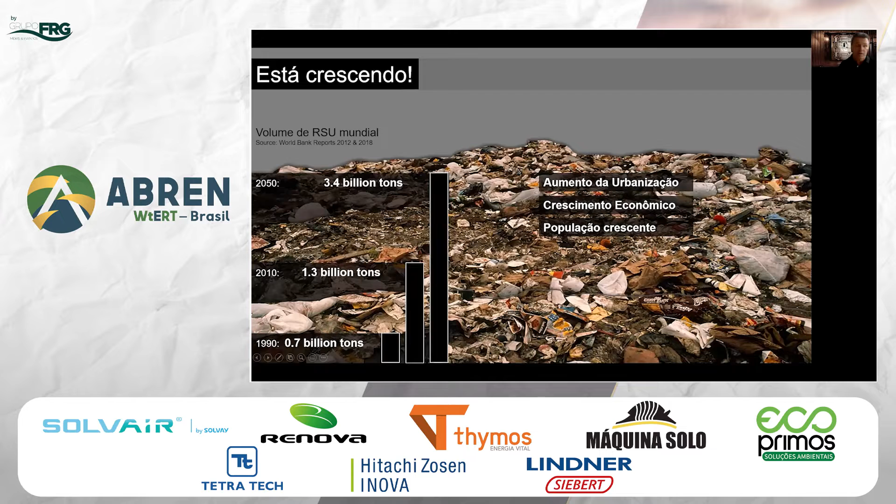So this waste management is a challenge everywhere. And it is polluting. It has a huge effect on our climate, on global warming, because landfills are producing a lot of methane gas emissions, which are 25 times stronger greenhouse gas than CO2. So the contribution on the overall emissions is significant.

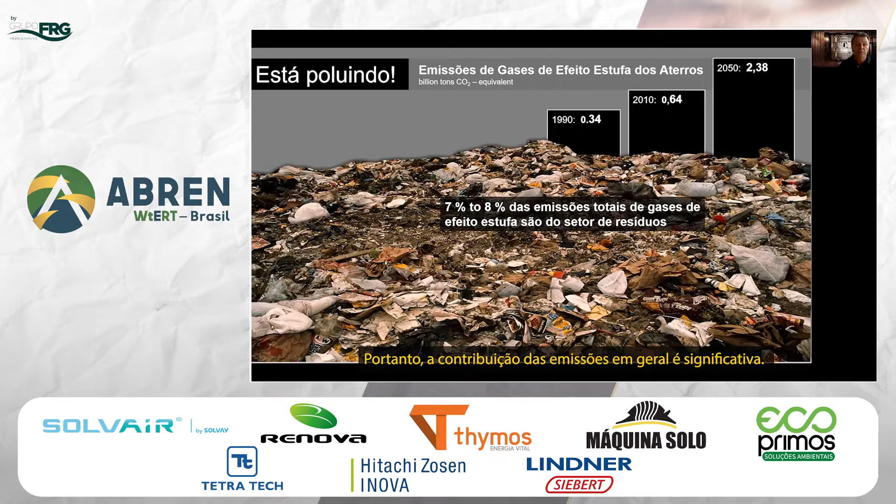Today, landfills are relatively cheap, but the cost will increase because there is almost no space for new landfills. You have a high cost for transportation. You have increasing compliance costs, so you have to follow higher standards, and you have to operate them even when they do not receive waste anymore.

And very important, they are not sustainable. I mean, they occupy territory, human habitat, it's wasted. They pollute groundwater and atmosphere for centuries, and generate also emissions for transport to remote locations. And very important, you cannot benefit from the value that is in the waste. So you cannot recover ecological and economic valuable resources from the waste.

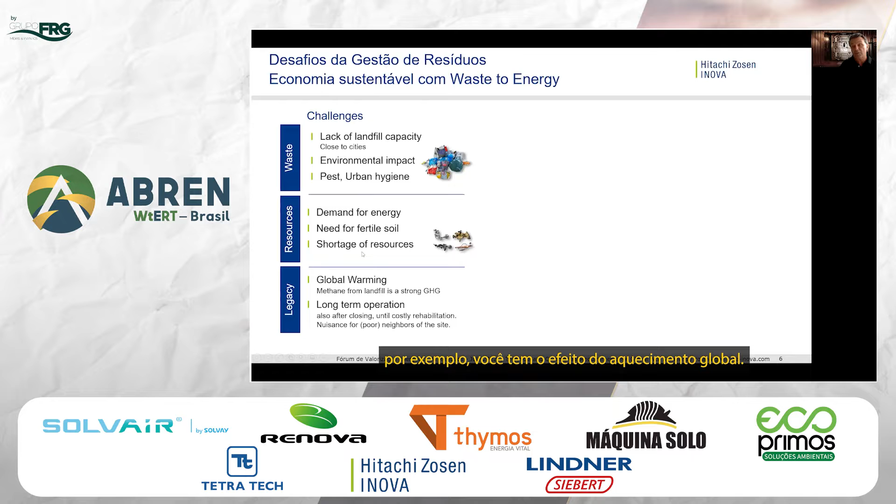So these are the challenges: lack of landfill capacity, the environmental impact. You have the demand for energy, for fertile soil, for resources like metals. For example, you have the global warming effect, and waste to energy has the solutions.

So we can protect the human habitat, protect groundwater, protect people from diseases. We can benefit from the energy content, generate electricity, produce compost from the organic fraction, and recover materials like metals. And we reduce the effect and reduce greenhouse gas emissions.

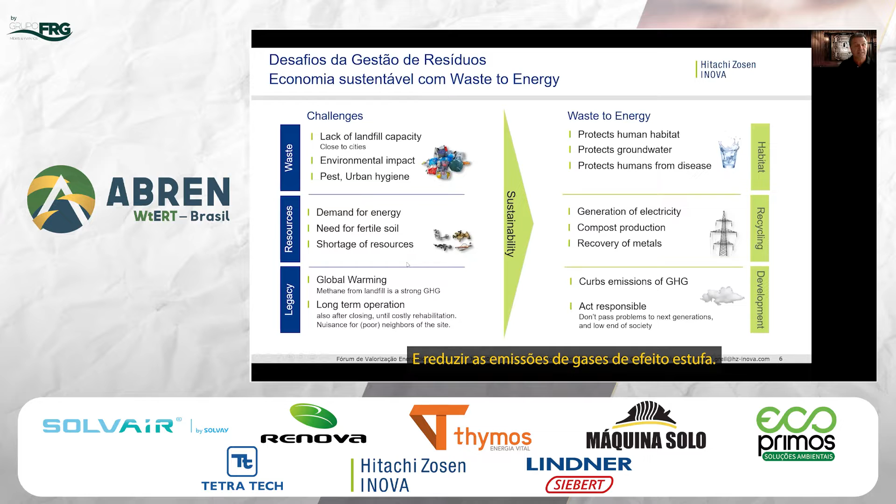So who is Hitachi Zosen Inova? We are the global lead in waste to energy. We are a company based in Zurich, with headquarters in Zurich, having offices in various locations. And we are in this business for more than 85 years. We do build plants, and we also operate and maintain waste-to-energy plants and other solutions that we provide.

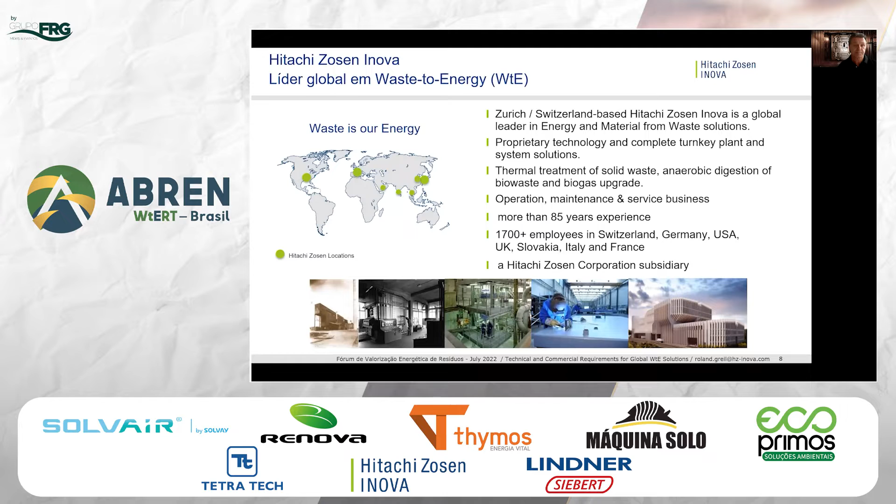We are part of the Hitachi Zosen Corporation group in Japan. Originally they used our technology when we were Von Roll. We started with the first plant in 1937-39 in the Netherlands, basically only a destruction of waste, no benefiting from the resource. Hitachi Zosen Corporation used our technology since the 60s as a licensee. And since 2010, we came together and are now in the same group.

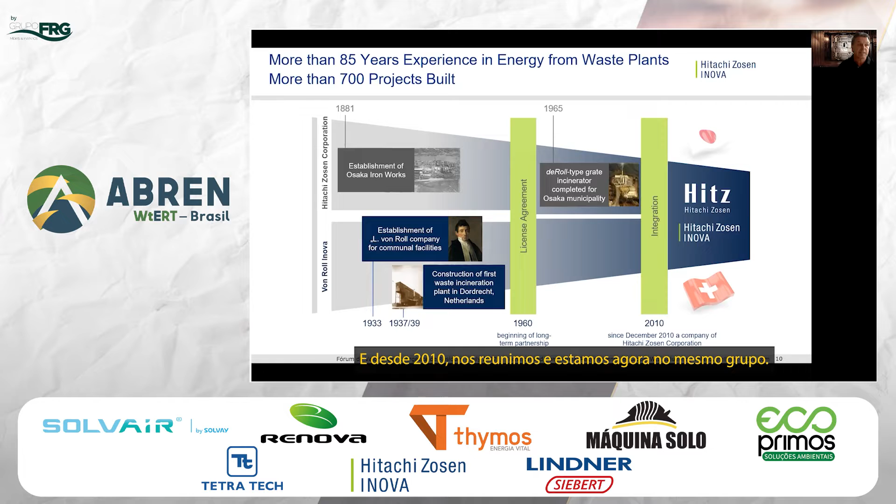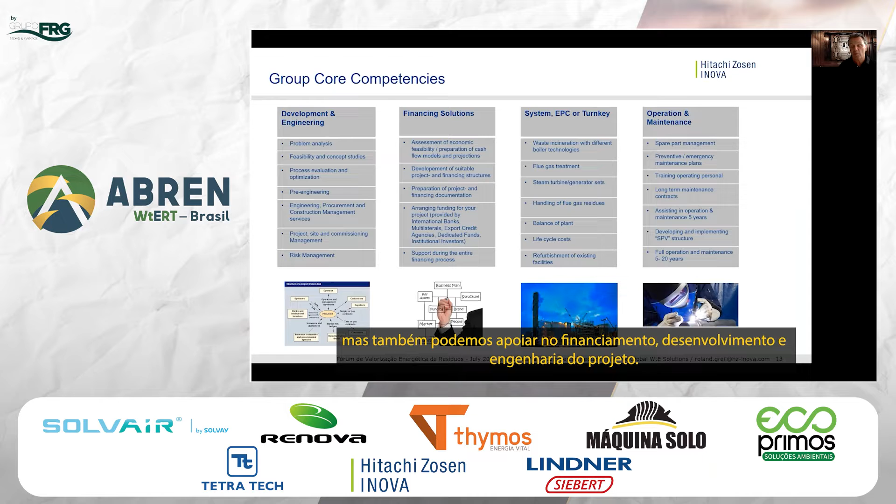We don't only build plants, so we have our own technology. We build the plant as a system solution or EPC turnkey. And as mentioned before, we also operate and maintain plants, but we also can support in the financing, development, and engineering of a project.

Waste to energy is a part of the circular economy. So we are all producing waste, we're consuming, producing more and more waste, which is polluting our environment. So in many countries, it goes still to landfills, where it can pollute the groundwater, and produce methane emissions, which is a very strong greenhouse gas - I mentioned before, 25 times stronger than CO2.

And by this, also polluting our food. I mean, waste plastic goes to the rivers, to lakes, to the sea, and we get it back in our food, in the fish that we eat.

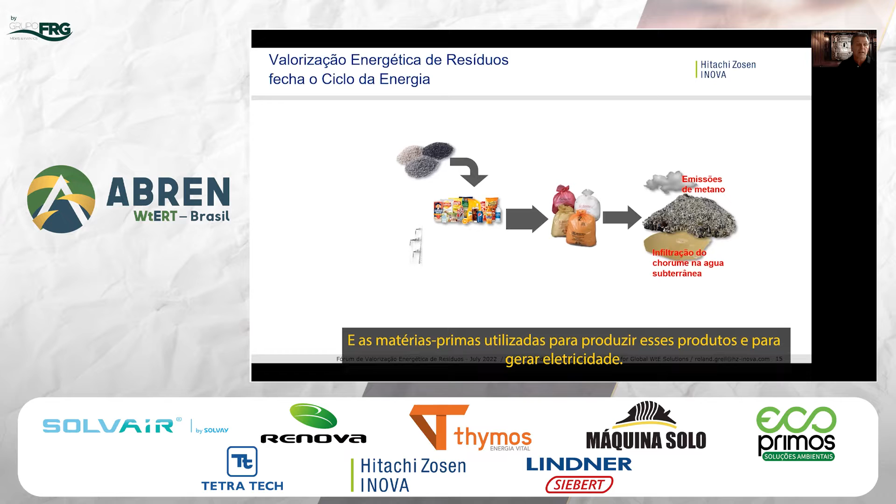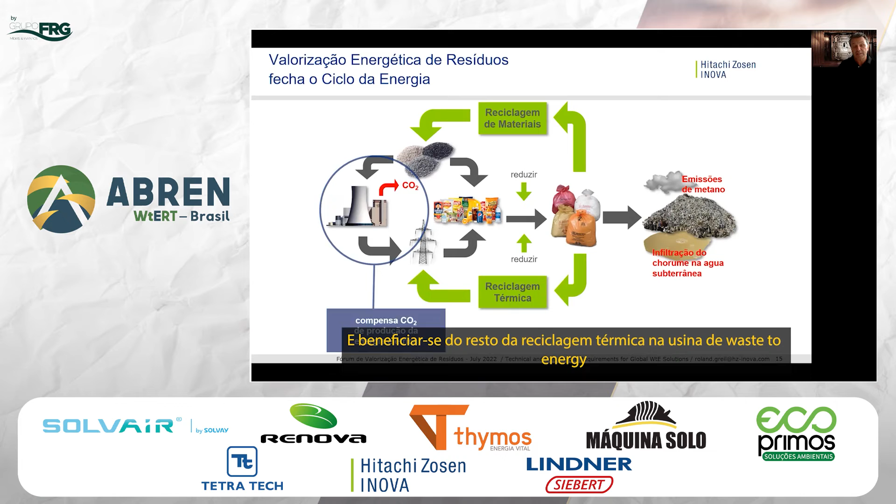Raw material is used to produce those products and to generate electricity. And what we have to do first is to try to reduce, of course, the amount of waste that we are producing. Then, of course, recycle material that has a value and can be recycled, and benefit from the rest in the thermal recycling in a waste-to-energy plant.

So by this, we can compensate CO2 emissions from energy production, which is a bit less relevant in Brazil because more than 80% is renewable energy in Brazil. And we can avoid pollution from landfills and have a positive impact on greenhouse gas emissions.

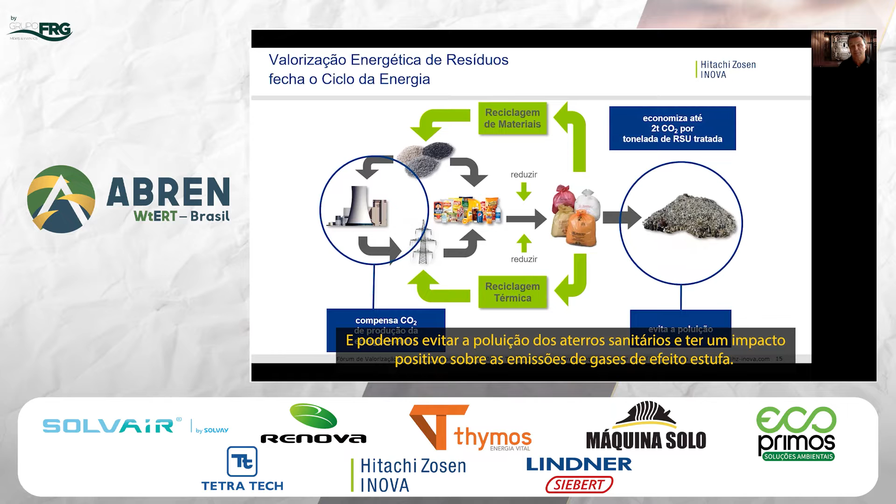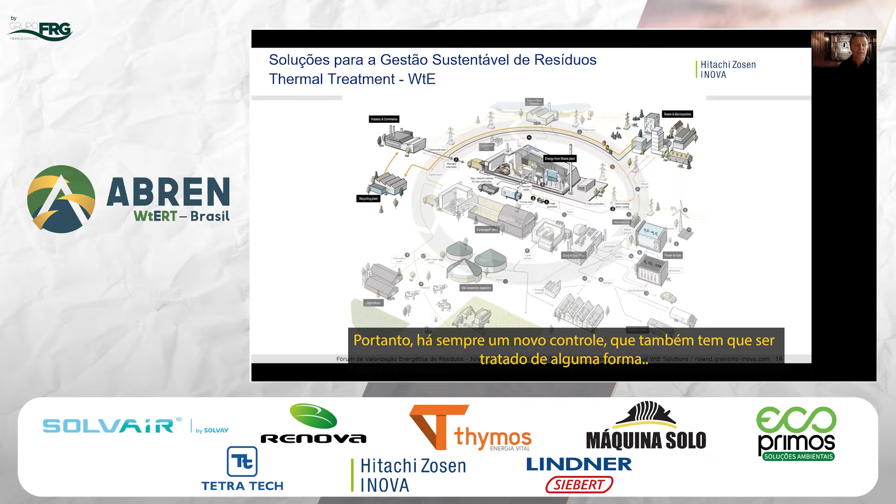So for non-recyclable waste fraction from municipalities, as well as from industry and commerce, waste to energy is the solution to benefit from the energy content and material that is in the waste. Also for a remaining fraction from the recycling industry, material which goes to recycling is not 100% recycled, so there's always a reject which also has to be treated somehow. This also goes to the waste to energy plant.

What is waste to energy? What is the purpose of waste to energy? First, it's volume reduction and destruction of toxic substances, concentrating the non-destructible toxic fractions in small amounts which can be well controlled.

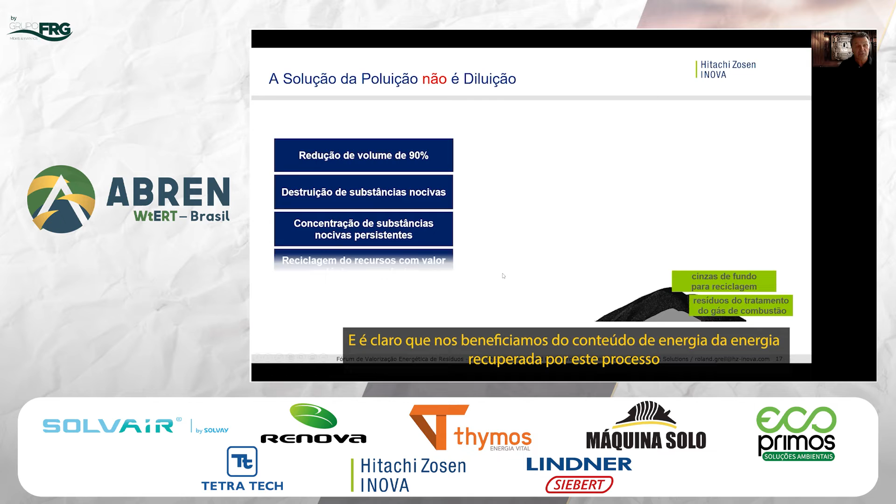And of course, we benefit from the energy content, so we recover energy by this process that is in the waste, and also material that is in the bottom ash and flue gas treatment residue - metals, ferrous and non-ferrous, that cannot be separated upfront but can be separated from the residues of combustion.

So waste has a value. It's not only the material that we can recover, it's also the energy. One ton, with a certain heating value, has about the energy content of 200 kilograms of oil and can generate at least 700 kilowatt hours of electricity. With higher heating values you can generate up to 1 megawatt hour per ton of waste, also depending on the efficiency of a plant.

So here you see what a modern waste to energy plant can reach as net efficiency today.

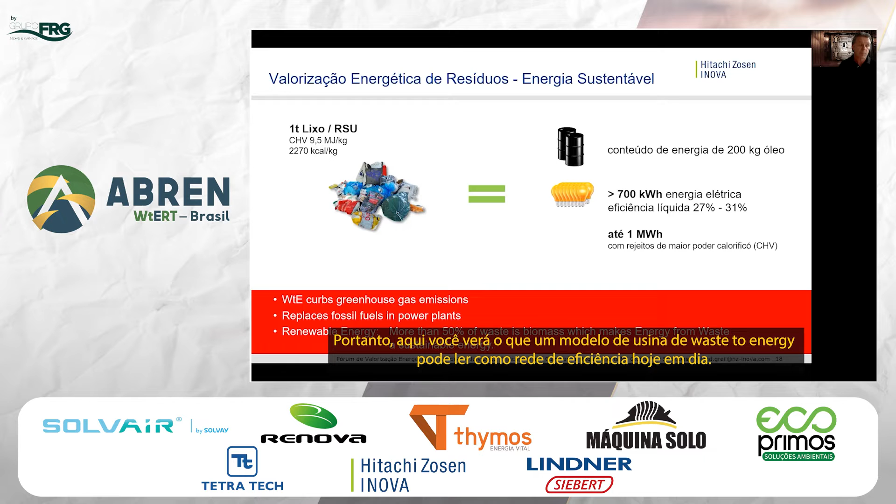For the bioorganic fraction, for the organic fraction, we have other solutions - anaerobic digestion. So all the organic fraction, which is preferably separated at the source, clean fractions from food markets, from the food industry, and also from agriculture, can go either to a dry AD solution, shown here, or to a wet AD solution. We have both technologies in-house, and also solutions for upgrading the biogas produced to biomethane.

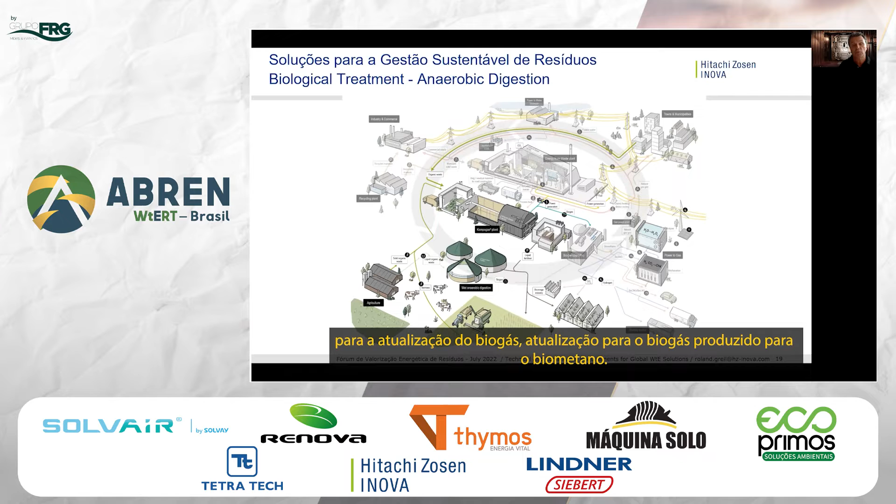This is the dry process, the Kompogas fermenter, where you feed food waste and green waste, and produce biogas in this fermenter, which you can upgrade to a fuel, to biomethane, and use in the grid system, or directly as a fuel for vehicles, or if that is not possible, generate electricity. And you can benefit from the organic material and use it as a fertilizer.

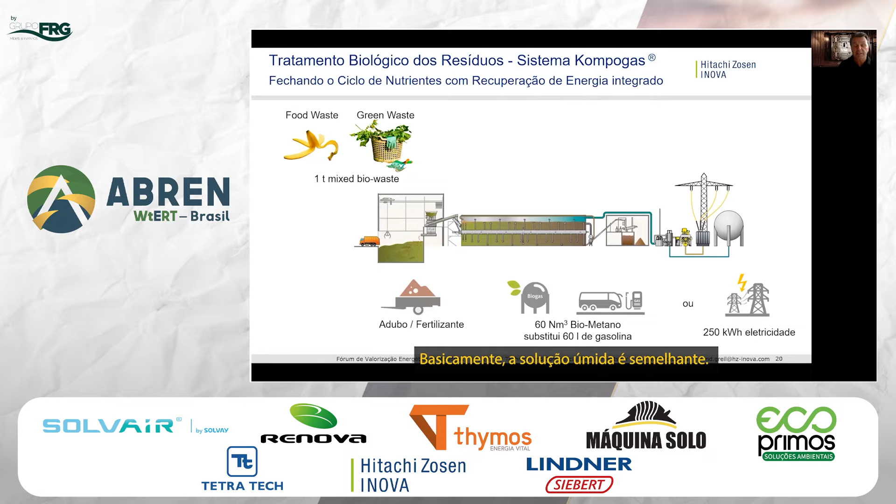Basically, the wet solution is similar. It's just that the input material is slightly different.

I will focus now on waste to energy. There are very high demands on waste to energy solutions today - very stringent limits for emissions, for example. We have to build cost-optimized plants to make a project feasible, efficient solutions to minimize operational cost, high performance to maximize revenue, design for a long lifetime, and of course, protect people during construction and during operation.

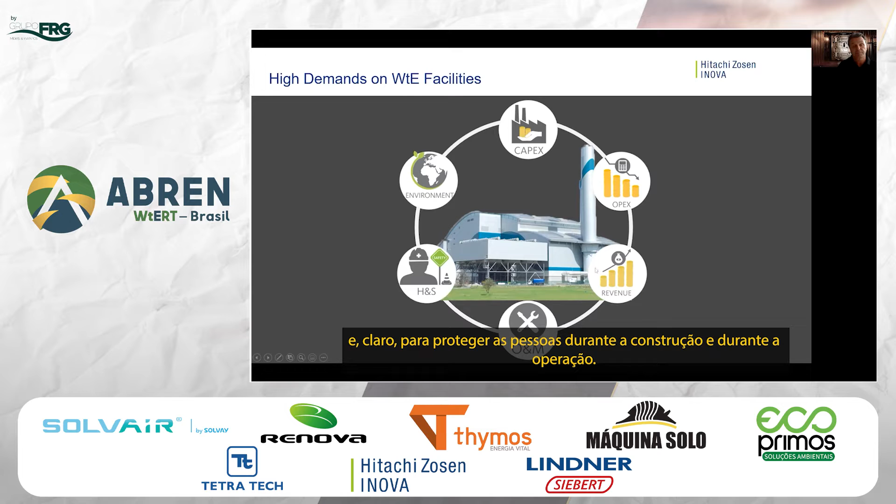We have all technology in-house - for the combustion boiler section, flue gas treatment solutions, residue treatment for bottom ash, flue gas treatment residues, fly ashes, as well as water in case of a wet system, and also energy utilization.

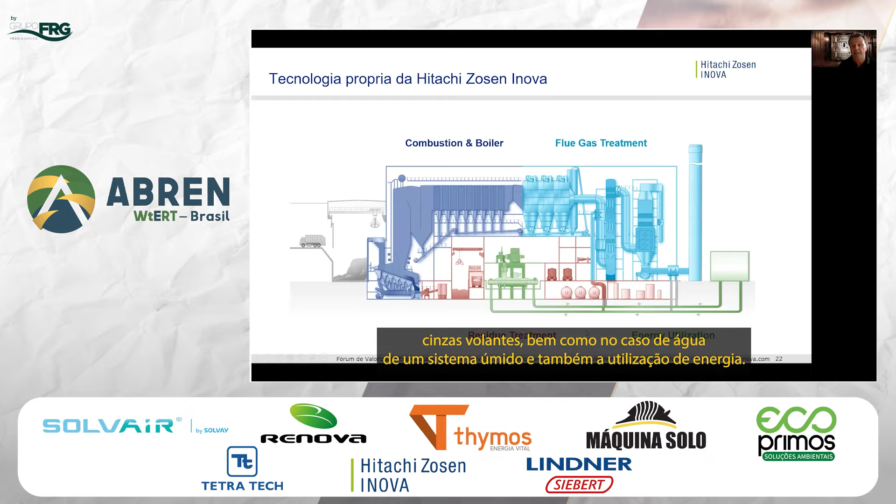So we can really deliver plants with high capacity. We can deliver today plants with a capacity in a single line of up to 125 megawatt fuel input, or about 55 tons per hour waste input.

And this combustion plant can treat treated or non-treated municipal solid waste, commercial waste, and commercial and comparable waste fractions, as well as RDF, for example, and can also co-combust sewage sludges.

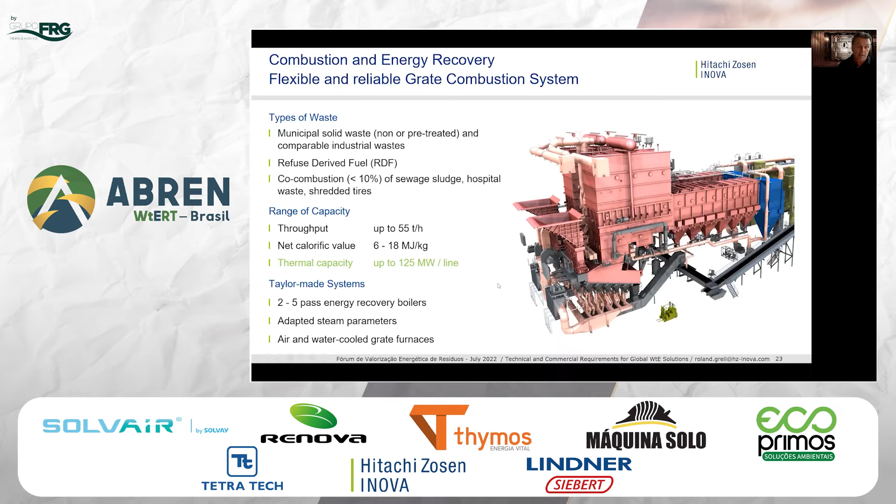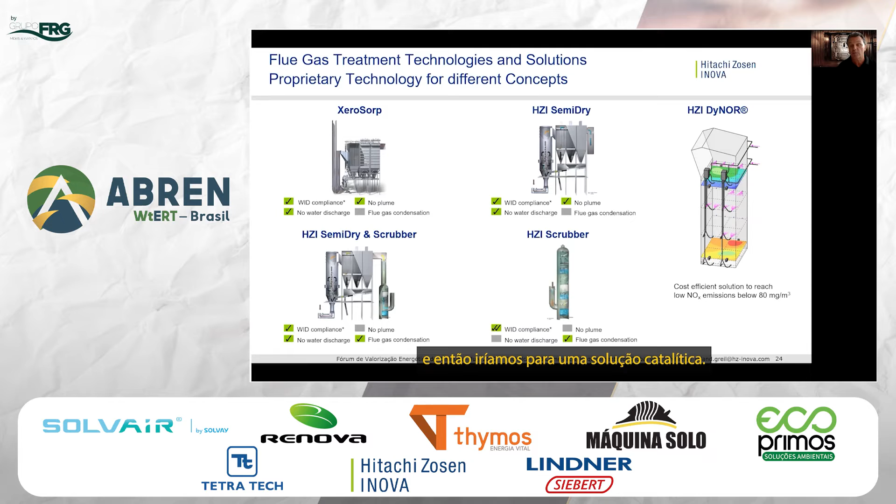For the flue gas treatment, we have different solutions, depending on the local requirements and the situation - a dry system, XeroSorp, semi-dry system, combination with wet systems, or only wet system. And for the NOx, we typically use an SNCR process, also our DyNOR process, which reduces NOx emissions down to a limit below 80 milligrams. Sometimes even more stringent emission limits are requested for NOx, and then we would go to a catalytic solution.

You see here an example on the left side, emissions measured at the plant, for the average of the two lines. This is the old European standard, which was valid until 2 years ago, and you see emissions well below these already very low limits. Europe has now introduced new emission limit standards which are even lower - here's a range compared to the old standard, and the new standard, the lower and upper range. You can see our solution and the plant built based on the old standard can even fulfill the new emission limits in Europe.

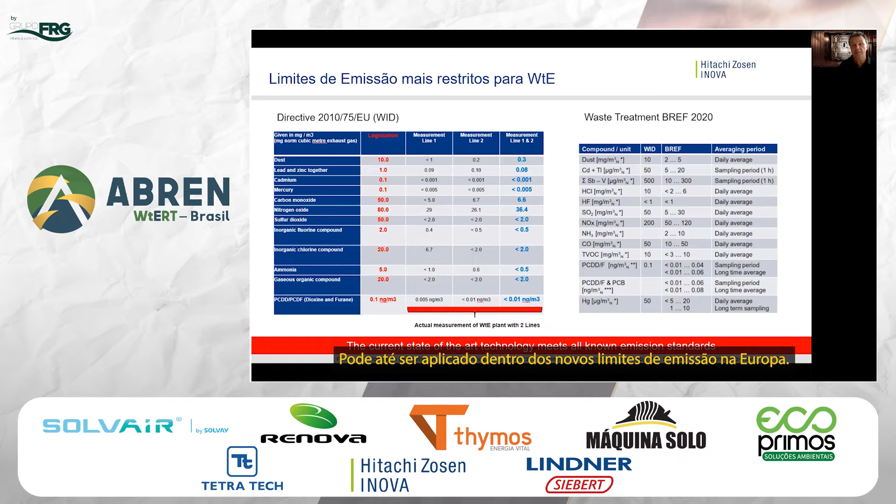So we wrap all together, so we have all the technology. This is a unique situation. We have the EPC experience, but also all technologies in-house, so we can wrap everything and provide an integrated solution with maximum efficiency and reliable execution. We also manage civil works activities, but of course we don't do that in all markets.

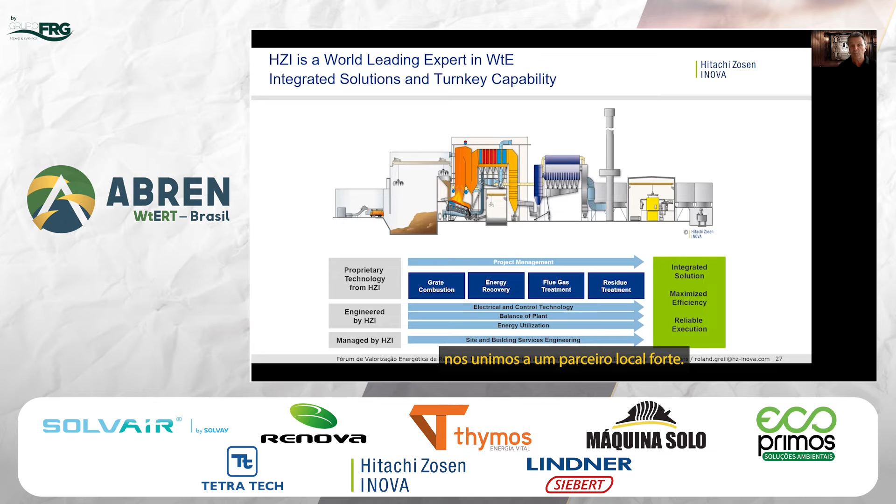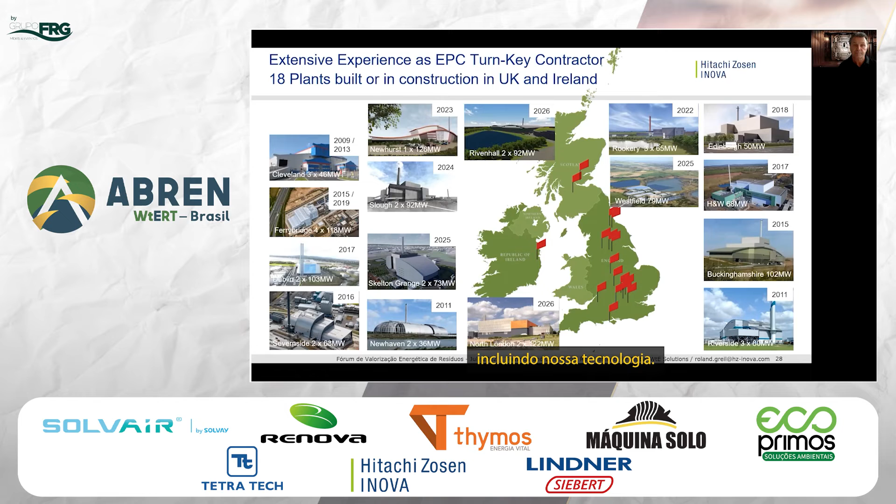UK was the biggest market in Europe by far, and we have been very successful. You can see all this have been EPC turnkey deliveries, including our technology. A good example, if you go to YouTube and search for Rookery South construction progress, you will find 4 movies showing the construction of a plant in the UK. Very interesting to see.

So Europe was our home base. Many plants have been built in the past in Europe, but currently we are active in many other markets. So we developed a project in India. The first plant has been built some years ago. The second plant is now in construction.

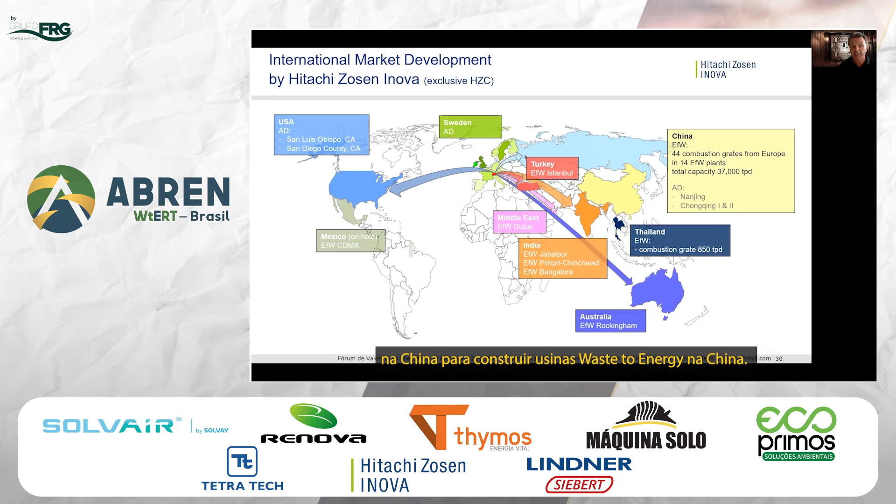We have built the plant in Turkey, which we will see later. We are currently building the plant in Dubai and Australia. We had a project developed in Mexico, which is unfortunately on hold. It would have been the first project in Latin America. And we deliver also combustion grates to our licensees in China to build a waste energy plant in China.

China was the biggest market in the world, 2/3 of the worldwide volume, and plants have been built in the last 10, 15 years in China. And you see also AD, that is anaerobic digestion. So we built anaerobic digestion projects in China, Sweden, and in the US, California.

So an example here, the biggest plant in Europe is in Turkey. The plant is in operation now for more than a year, designed for very, very low heating value, lower than what you would expect in Brazil, but has still a good efficiency of around 29%.

Another example is Rockingham, Australia. Also here in cooperation with a partner, a local partner that has a good track record locally to build that plant. And the biggest plant in the world, contracted as a single project, is in Dubai, currently in construction. The first 2 units of the total 5 units will start to generate electricity in a year.

And in spite of the very high ambient temperatures in Dubai, this plant has a net electrical efficiency of 31%. Also in this project, with a partner that is taking care of the civil works activities. And in this project, very interesting, we also will operate this plant together with the same partner for 35 years.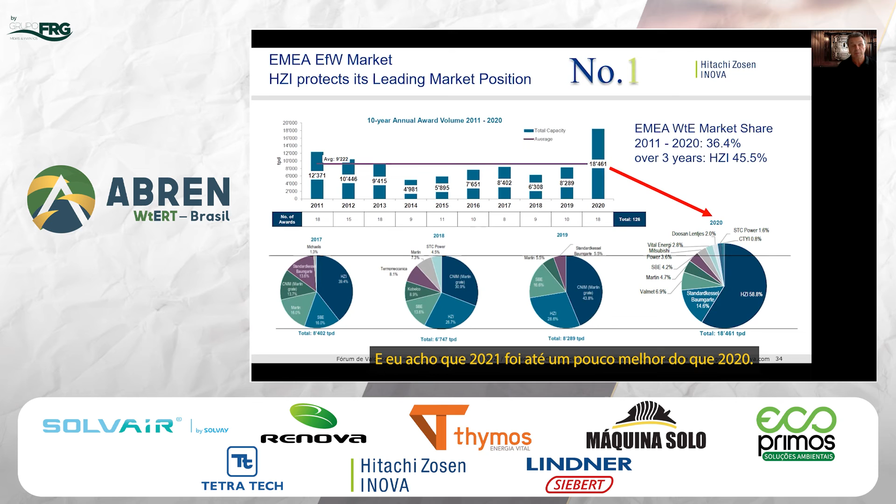So beside all these other aspects that we have seen, financing is a very, very important aspect in realizing this kind of project. And we as HZI, as a Swiss company, can provide ECA-covered financing with the support of the Swiss Export Credit Agency, SERV.

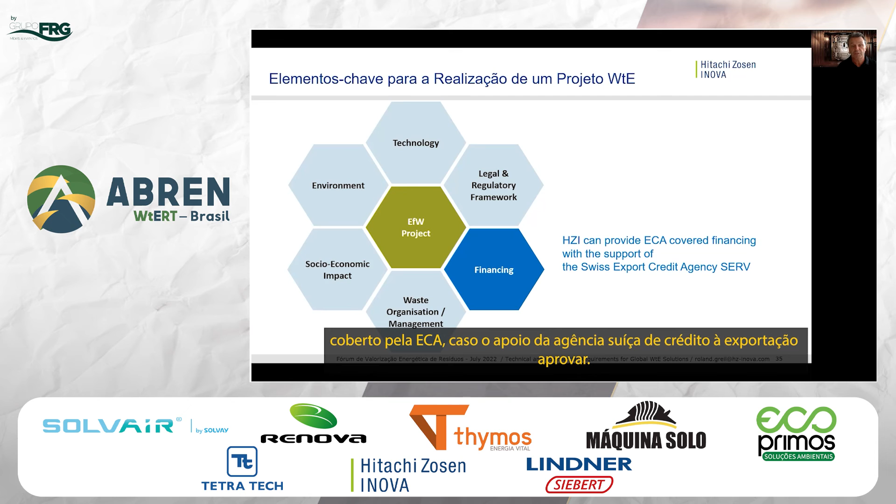So we can deliver proven, mature technology. We are experienced. We have a significant balance sheet together with our parent company, and we have experience in O&M.